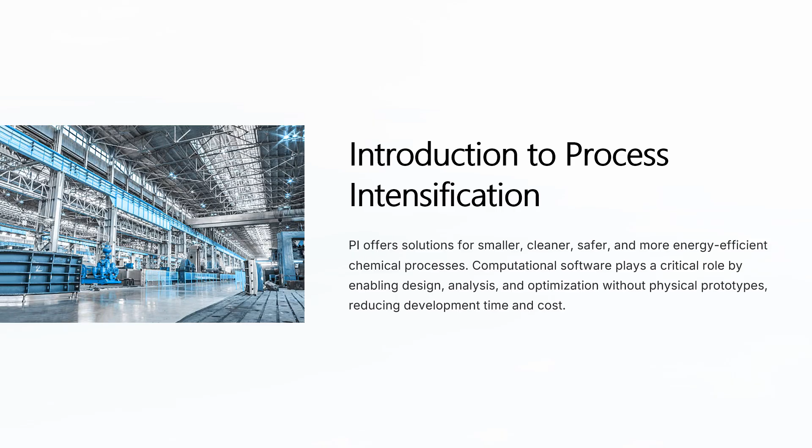Fundamentals of PI. PI follows a few powerful principles: reduce equipment size and energy consumption, enhance reaction rate and selectivity, integrate multiple steps into a single unit, improve heat and mass transfer efficiency. Examples include reactive distillation, spinning disc reactors, membrane reactors, and microchannel systems, each showing how clever design can transform performance.

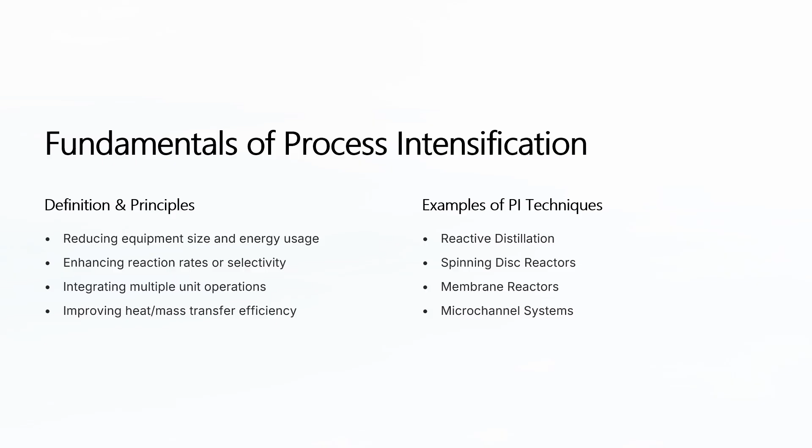Now, the role of computational software. Without computational software, PI would be slow, costly, and risky to implement. These tools allow engineers to test ideas virtually, explore hundreds of design variations, and predict potential hazards, all before touching physical equipment. They speed up innovation and allow safer, smarter decision making.

Modeling and simulation tools. Modeling tools like Aspen Plus, COMSOL, ANSYS Fluent, and DWSIM are central to PI. They allow us to capture complex thermodynamics, simulate chemical reactions, and study fluid flow with precision, revealing design improvements that might otherwise be missed.

Now, process optimization. Once a design is modeled, optimization software such as MATLAB, Simulink, GAMS, and Python Pyomo or SciPy helps fine-tune it. We can minimize energy use, maximize yield, and find the best operating conditions, even for systems with multiple changing variables.

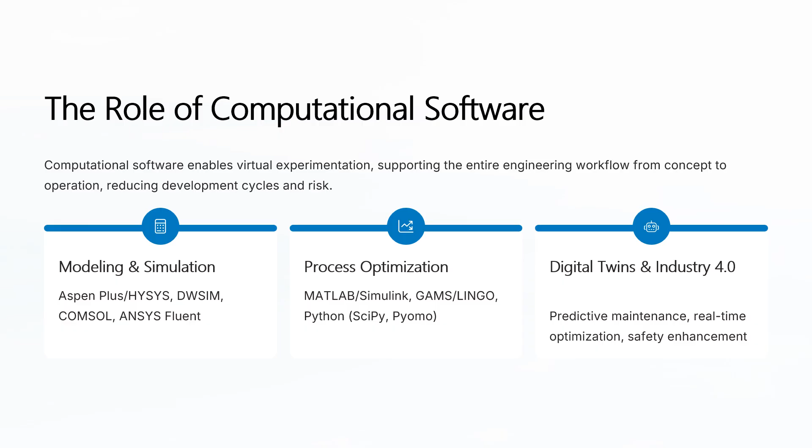Digital twins and Industry 4.0. Digital twins take the system even further, creating a live virtual replica of the process that updates in real time. Combined with Industry 4.0 technologies, they allow predictive maintenance, real-time optimization, and safer plant operation, making facilities smarter and more responsive. Let's move on to the case studies.

Aspen Plus. In bioethanol production, Aspen Plus was used to model reactive distillation, and the simulation achieved 35% energy savings and over 98% purity, a perfect example of how virtual experimentation can deliver real-world efficiency gains.

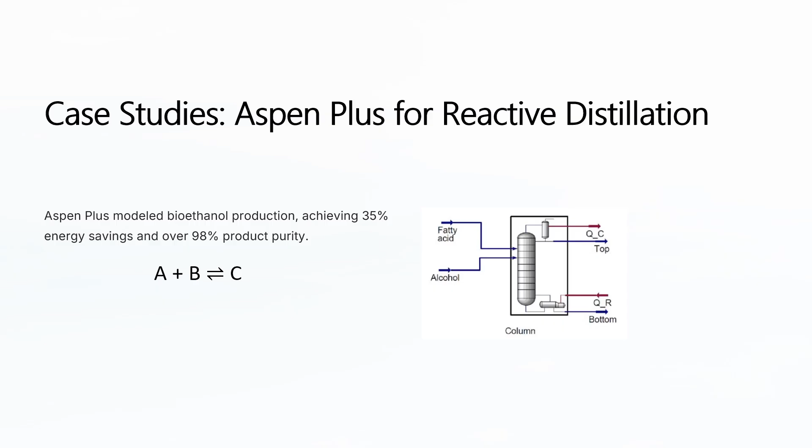Case study for COMSOL and ANSYS Fluent. COMSOL was applied to hydrogen membrane reactors, optimizing membrane geometry and temperature for better output. Similarly, ANSYS Fluent modeled microreactor flow in nitration, improving mixing efficiency and ensuring safer operations.

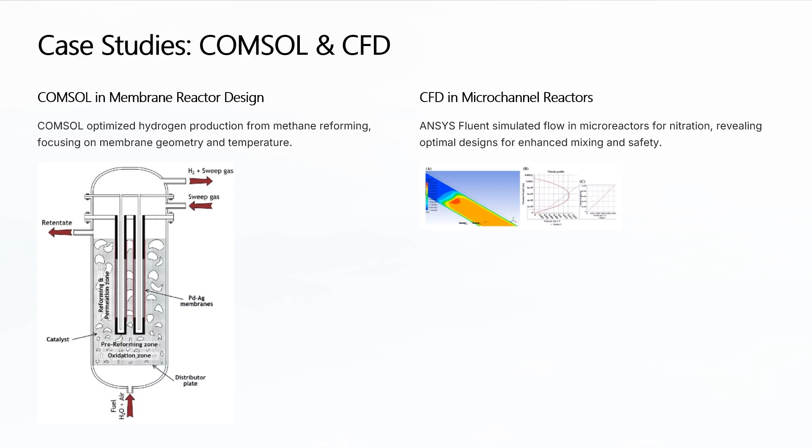Case study for MATLAB. MATLAB multi-variable control systems were used to manage a complex heat exchanger by adapting to real-time changes. The system cut energy use by 20% during dynamic operations, proving that smart control means real savings.

Now, the benefits of computational tools. The advantages are clear: lower development cost, faster design cycles, greater accuracy and process insight, improved safety through hazard simulation, space for innovation in both equipment and process designs, and better sustainability through optimized resource use.

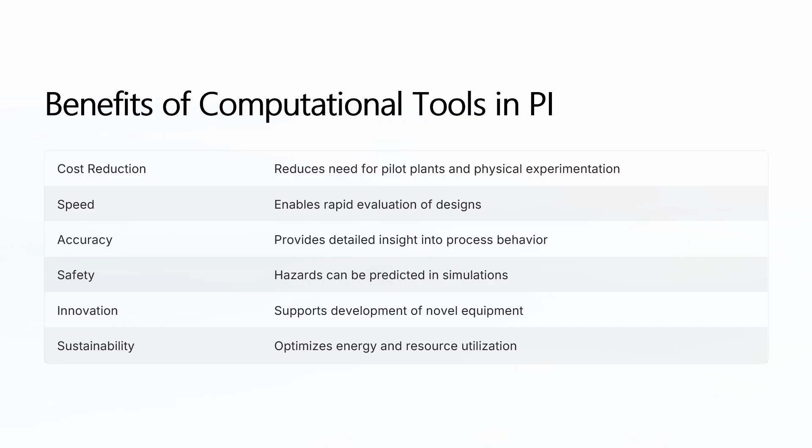Challenges and future directions. However, there are challenges: high computational cost, steep learning curves, and the need for accurate input data. The future of PI lies in integrating AI and machine learning into simulations, adopting cloud-based platforms for large-scale modeling, and creating more accessible open source tools to widen participation.

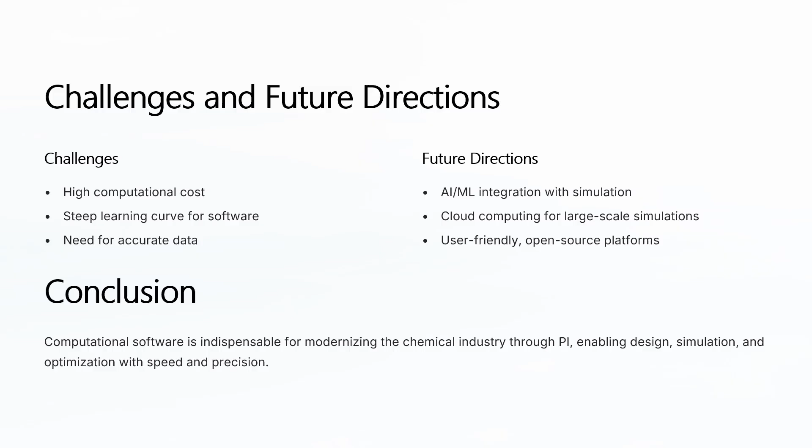In conclusion, computational software is no longer optional in chemical engineering. It is the foundation of the next generation of processes. By combining the principles of process intensification with the power of simulation, we can design systems that are cleaner, faster, and more resilient. As upcoming engineers, our role is clear: master these tools, push innovation forward, and lead the way to a smarter chemical industry.